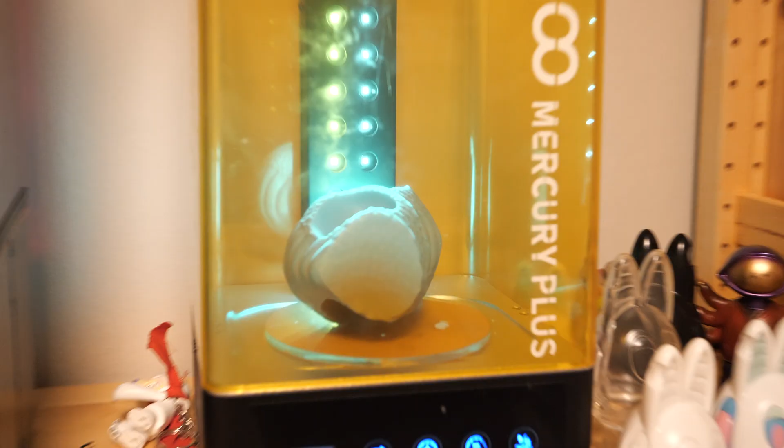Hello! Today I was thinking about making a resin toy. I've been doing all these vinyl toys, but I was thinking about the possibility to show you how to make a vinyl toy. I'm going to make another video about the design, but right now I want to show you how to create your resin toy. Let's begin with this demonstration.

When I'm printing my toys, I'm using software that came with the 3D printer. The toy that I'm going to print today is a toy that is going to be a vinyl toy in the end. So this is a 3D print for the prototype that is going to be a vinyl toy in the future. When I get someone to make the 3D model, I ask this person to separate the different parts of the toy. So for example, if you have this toy, you have the hands, arms, and you have the body that moves, and you have the legs.

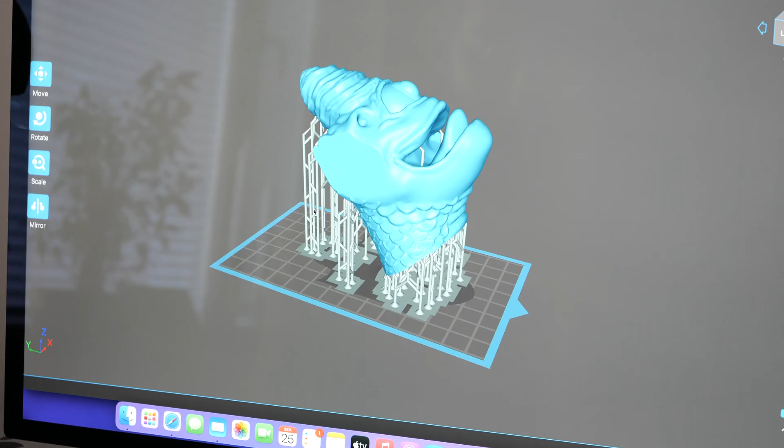When you design a toy, you are going to think about how many parts your toy is going to have. So when you have all the parts, open it on this program in Chitubox. I usually try to put the part in the best way possible for the print. And the best way possible for the printing is a way when you don't produce any island. And what is an island? An island is just a part of the printing that prints separate from the main model.

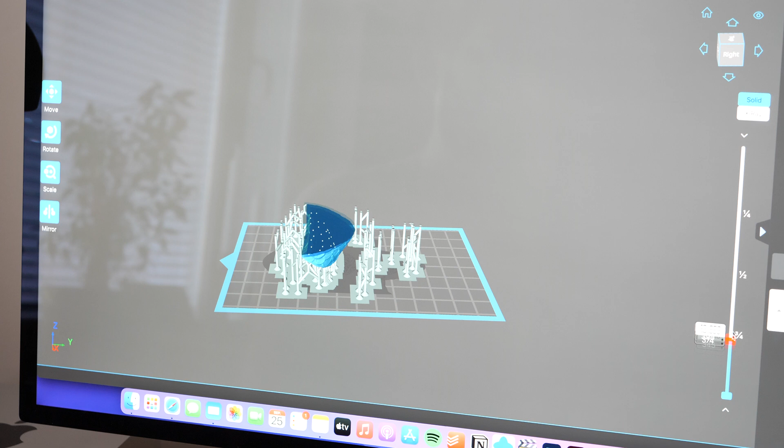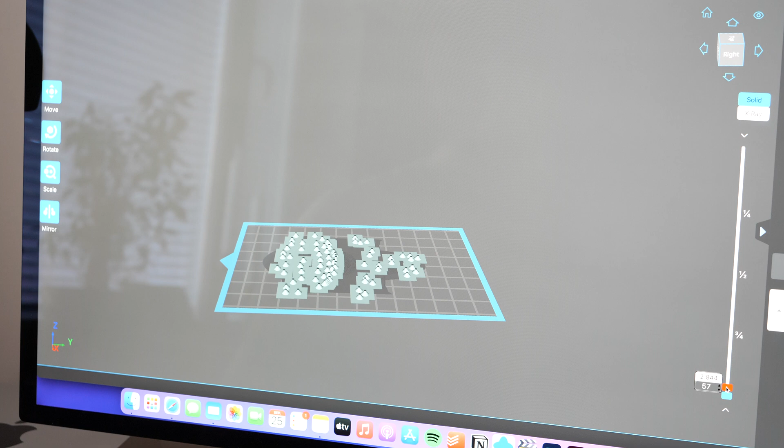So for example, if you drag this bar here to the right, you're going to see how this model is going to print in the real printer. So first, the printer is going to print the base, and then it's going to add a few layers on top of it. And then it's going to create first the base and the support, and somewhere it's going to begin creating the figure in the supports. So as you see, the toy is printing, and is going to create all the toy until everything is printed.

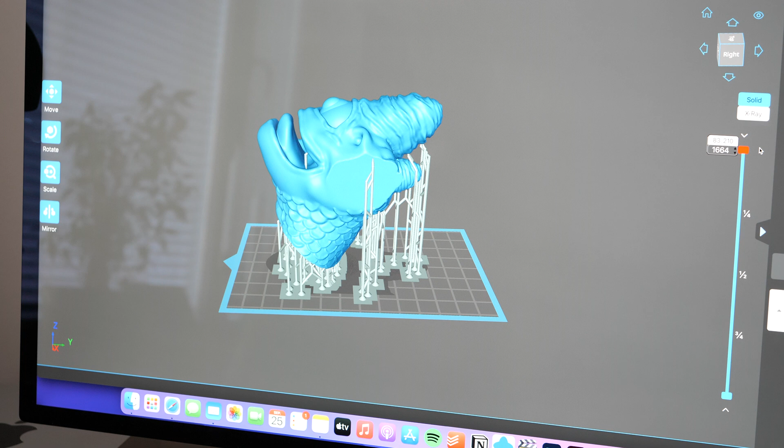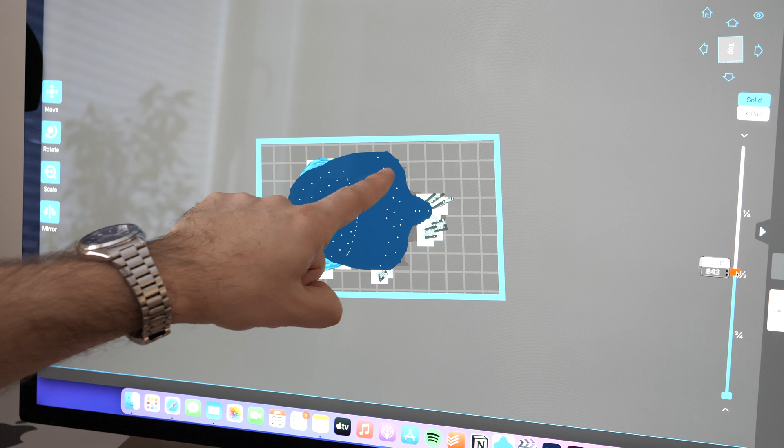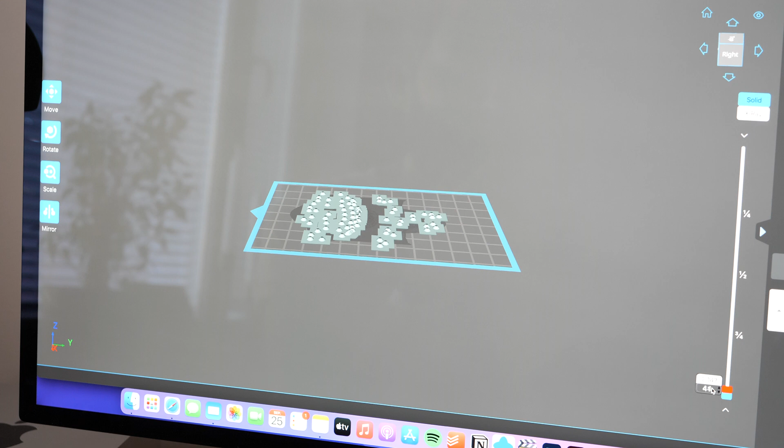What is an island again? If you see the top view of the toy, some of this blue part begins to create outside the support by itself. That thing is an island. If you see every part of the piece, all is printed on top of itself until you come to the end, and this is the end product. If you see islands, then your print is going to fail. So the first thing you need to do is to move around your part and see if all the toy is printed on top of itself, everything from the lowest part to the highest part.

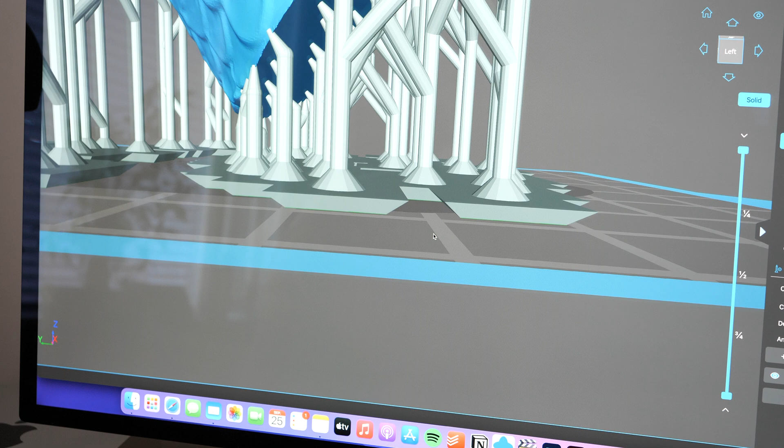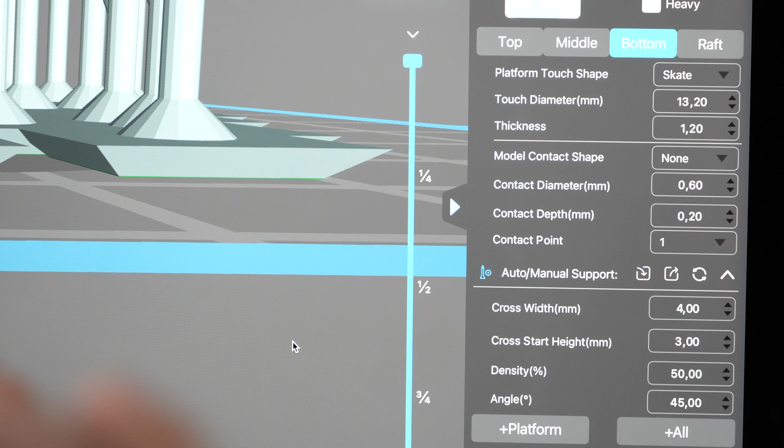To create the supports, you need a very good base, because this base is what is going to support the toy. In my specifications here on the right, I'm not sure if you can see them, on the bottom of the toy I have something that is called skate. This is this kind of form here, that helps me lift the toy from the platform when it's printed. So I have this kind of settings. I think they are the normal settings, nothing very abnormal. It's worked very well, always with the medium support, and it's working perfectly.

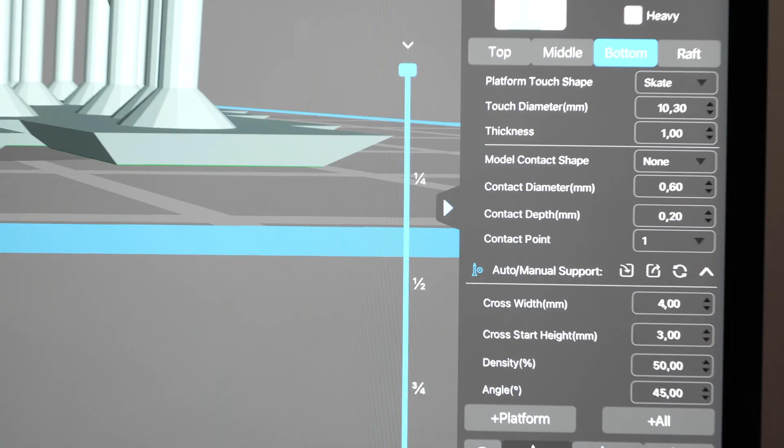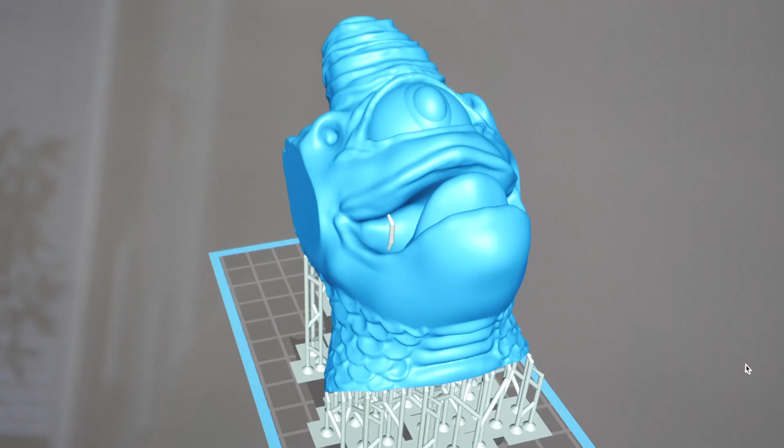So you can pause, and you can see what kind of settings I have in the bottom part, in the top, in the middle, and the raft. The raft is just the bottom place, the platform. My toy, this piece here, is not hollow, and that means that it's going to weigh a lot. On the other hand, if you do a hollow piece, then it's not going to weigh a lot. So you can choose what kind of settings you want and where to put the support.

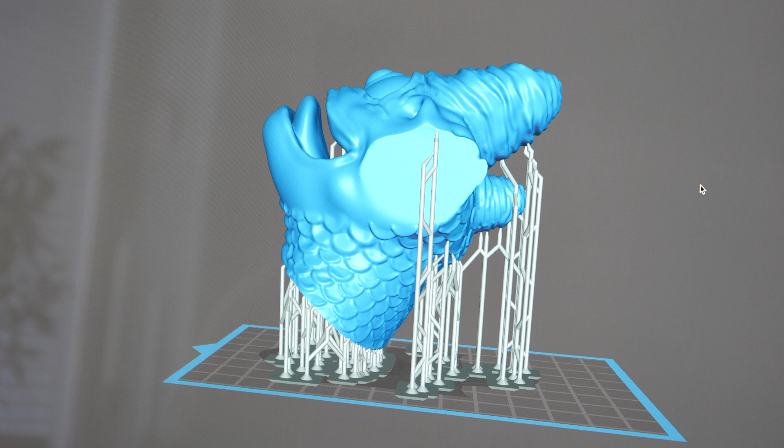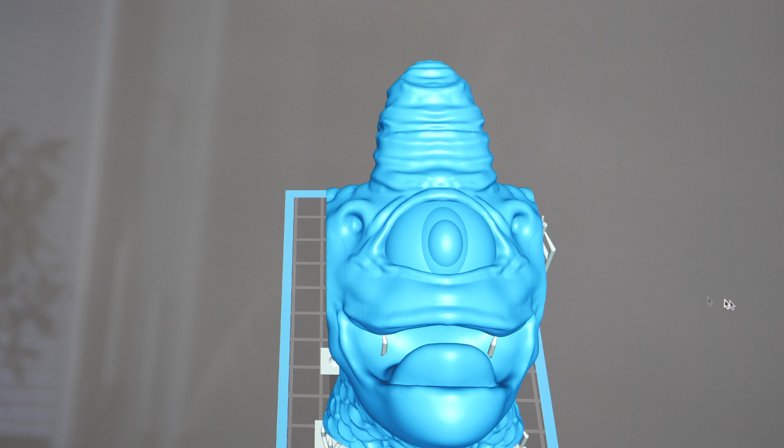I usually situate the part in the best possible position. Then I usually put the support in the base of the toy and then in the back of the toy. Because you will always see the front part of the toy, it's better that the connection points happen in the back of the toy and not on the front, so we can still have detail there. In this program, in Chitubox, you see that there are some red things. These red points mean the best places to put the support.

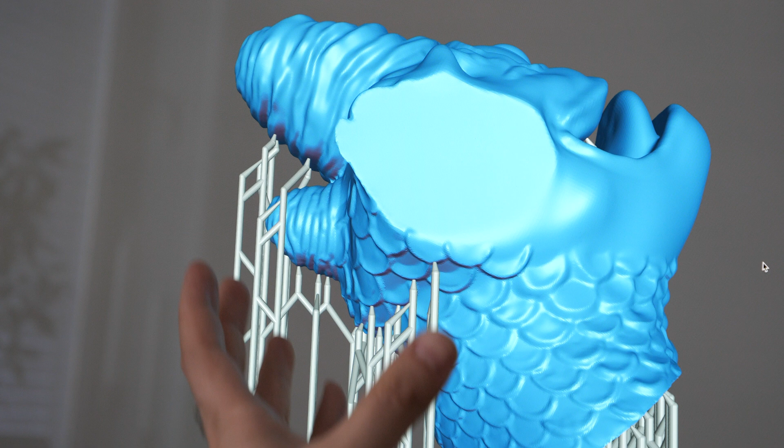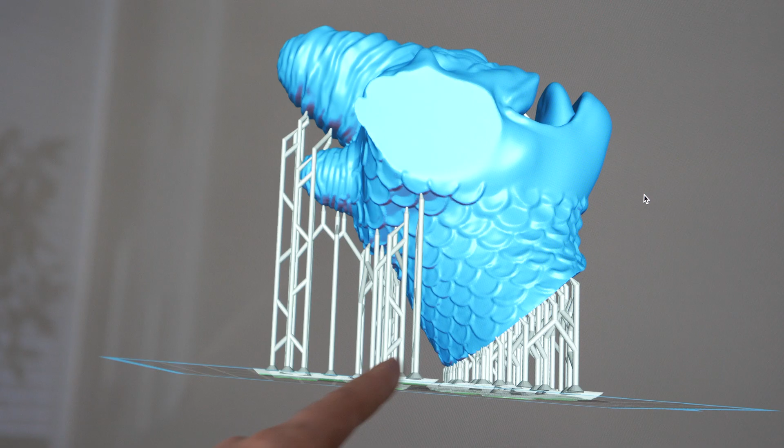One thing that I can say to you is that you should think about where the weight of the toy is. In my case, the weight is in the back of the head because it's going to print upside down, so it's going to have a lot of weight here. So I put the support in this back part here. So my supports are in the base and here in the back. And then when I slide it, you can see that everything is printing perfectly. Everything is constructed virtually perfectly. So this is possibly going to be a successful print.

Now that you see how I do preparing these toys for the printing, I want to show you what kind of resin I use, what kind of machine I use, and what kind of tools I use to print this toy. Let's see it.

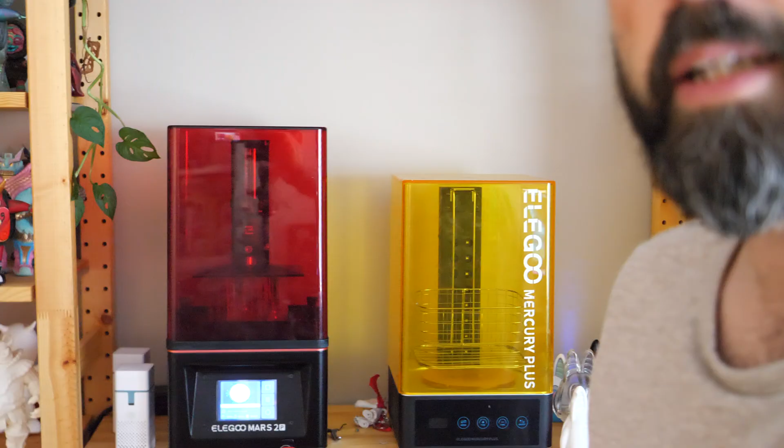These are the two machines I'm using to print and wash the resin printed toys. Right now I'm printing in my Elegoo Mars, the red one. I'm printing a toy and it seems to be working perfectly.

I should talk a little bit about this machine. It's an Elegoo Mars 2 Pro, 2 years old, but it still works perfectly. I love this machine because it helps me create the prototypes I want, and I've never had a problem with it.

You can clean the tank, play a little bit with the settings, and then just connect a USB like this one, share your print with the machine, and now it's printing like this.

The other machine here is an Elegoo Mercury Plus. It's a wash machine, but also has this UV cure feature with lamps that cure the resin toy. As soon as the printing is done, I take everything off the platform, separate it, clean it, and put it in this machine.

I usually put it in for around 2 minutes rotating with the UV. I don't use this machine to wash it, I do that by hand. I wash it in isopropanol.

I'll show you a little bit about the tools and materials I'm using. Be careful with the time, because you can break the resin inside this UV chamber.